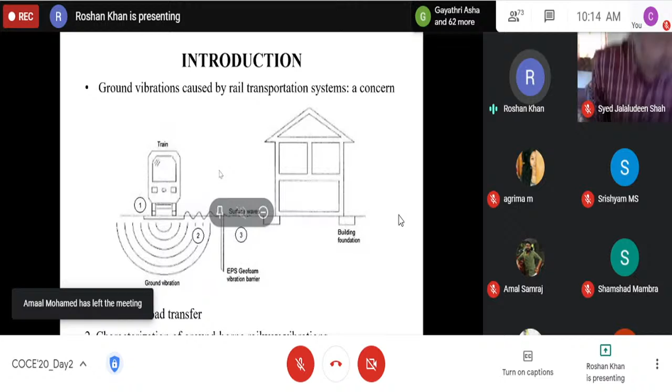And in the third phase, we can see that these vibrations are being transferred from the railway track onto a surrounding building. So we will be introducing a barrier between this so that the vibrations won't be reaching these sensitive structures close to the railway tracks.

That is our aim. So throughout this lecture, I'll be mentioning all these three parts. The first part is transfer of the load from the train. Second part is the generation of the vibrations. And the third part is how to stop these vibrations from reaching a sensitive structure.

It is known that the vibrations will be higher when the train is transferring more load onto the ground. And also when the trains are longer, the period of travel will be higher on the track, and then again the vibration generated will be higher.

So in this study, what we are trying to find out is what will be the difference, or what would be the impact, when the speed of a train changes. So that's what we are studying.

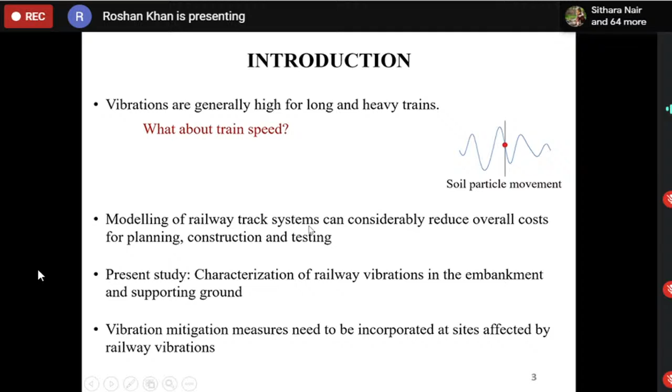And as you know, the modeling of railway track systems can considerably reduce the costs as well. So if you're considering a test in the field, it will take a lot of money and a lot of time. So instead, if you want to model n number of tests, n number of railway passages, you can do that in a software easily.

But you need to validate the software first. So whenever you're doing a numerical modeling test, or whenever you're trying to model something in the computer, first you have to validate whether your model is working properly. So that is the first challenge when you're doing this.

So once we are finding out the vibration levels, after that we are trying to find out how we can reduce these vibrations. That will be the final part of the study.

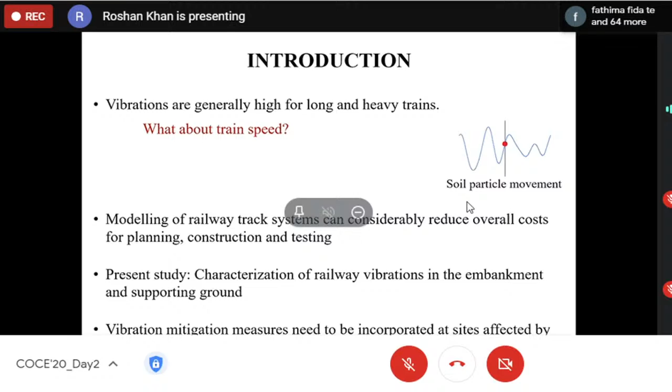So if you would go through the recent literature, what you can see is that there are two basic drawbacks in the studies currently being conducted on high-speed railway studies.

First of all, whenever we are modeling railway operations, the first thing is that we assume a load from the wheels. So you can see that there are two rails, and the wheels are rotating over the rails. And when these wheels are rotating, there is a vertical component in the downward direction and there is a frictional component in the horizontal direction.

Whenever studies are being conducted, it is generally assumed that this vertical load is dominant and usually the frictional component is neglected. But from this study, what we found out is that even this friction plays a major role in the vibrations being generated. So the first assumption general studies make is that they assume the train loads to be vertical point loads and then assign a time history. But this is wrong. In spite of having the vertical load, we should also consider the horizontal traction stresses.

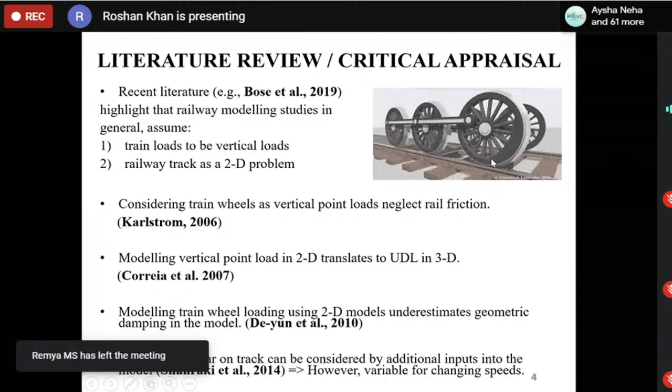And the second assumption what generally people do is they consider the railway track as a 2D problem. So the railway track basically consists of the rails, and these rails are supported on sleepers, and these sleepers are supported on the railway embankment. And this railway embankment can be above the ground surface level or it can be at the ground surface level also.

So after these rails, we have sleepers. Sleepers are supported on railway embankments, and this railway embankment is supported on the natural ground. So in this study, we will be finding out what are the ground vibrations in all these different layers.

Whenever we are considering the railway track as a 2D problem, the issue is that for a railway track stretching over kilometers, the track section will not be constant. For example, the natural ground might be filled with sand at one place, and around 500 meters away it may still have sand and silt, while the next place might have a layer of laterite. So at the site, you cannot simply assume the railway track is a 2D problem. Whenever we are modeling, we have to consider the railway track as a 3D problem.

These problems were actually discussed by different researchers over time. In 2006, Karlstrom mentioned that whenever we consider train wheels as vertical point loads, this basically neglects the rail friction. That is the reason why we need to use 3D models, so that we can consider both vertical loads as well as input the frictional stresses on the rails.

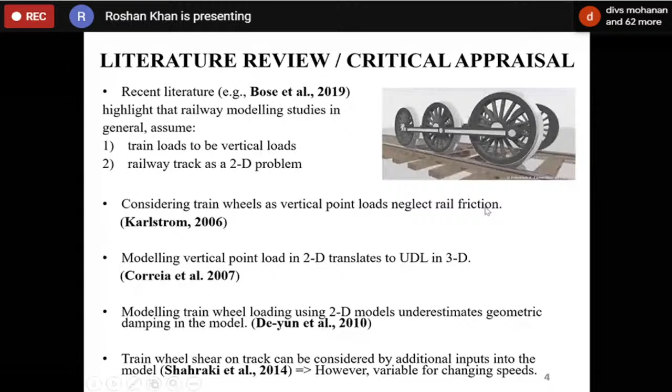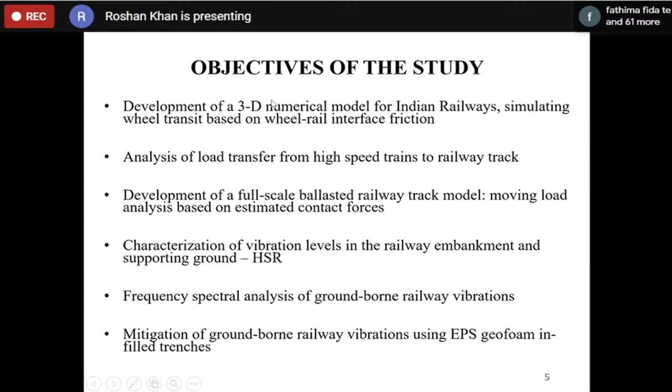As I mentioned, I'll briefly summarize this. The first part of the study will be to find out the load transfer from the wheel onto the rail. In the second phase, we will find out the vibrations caused by these forces. And in the third phase, once we know the vibration levels, we look at how we can mitigate these vibration levels.

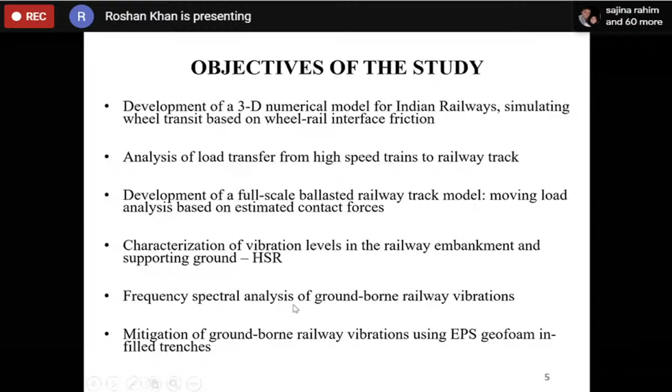One important factor to consider is that, in addition to finding the peak particle velocities of the vibrations, it is also important to mention at what frequency these vibrations are occurring. For that, we are also considering the frequency spectral analysis of the ground vibrations. I'll mention this in the later slides.

In the previous slide, I mentioned that in addition to the vertical load, we need to consider the friction in this contact patch. So what will happen if you don't consider these frictional stresses? Imagine we have a vertical point load, and when considering the passage of the wheel on the rails, the wheels will simply slide on top of it if there is no friction.

In this study, we estimate both the normal contact pressure, which is the vertical pressure acting in the vertical direction, as well as the traction stresses, which are the friction stresses acting in the horizontal direction. If the wheel is traveling in the forward direction, the friction stresses act in the backward direction, so friction will be equal and opposite on the rails.

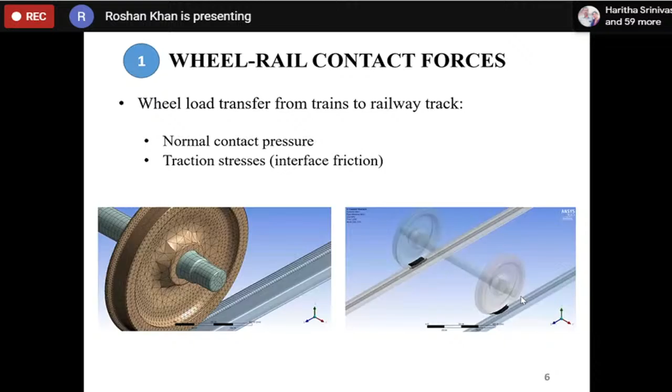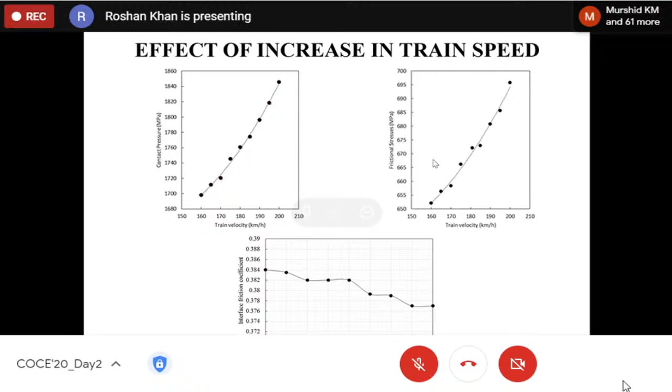So we're considering an increase in train speed by 25%, and we're considering how the contact forces act when there's an increase in train speed from 160 to 200 kilometers per hour. In both these top graphs, you can see that both the contact pressure as well as the frictional stresses increase with respect to the train speed.

This is a quadratic increase, as you can see, but the two are not similar. The vertical contact pressure is increasing more steeply, while the frictional stress increase is slightly less steep. So the contact pressure increase is higher than the frictional stress increase, and this is represented by the third graph, which shows the wheel-rail interface friction.

There is friction occurring between the wheel and the rail, and normally for steel interfaces, the interface friction coefficient value is 0.4. But in our study, we found that the value doesn't stay at 0.4. With the increase in train speed, the interface friction value starts reducing.

Just imagine that in this case, the train speed will be higher. What happens is we will again have a drop in the interface frictional coefficient value, so this will start dropping. At one point, we may be losing traction, so that the wheel won't be able to spin properly on the rails. So we should always maintain this value at an optimum value of around 0.35, so that the train doesn't slip on the rails. That is considered the optimum value internationally.

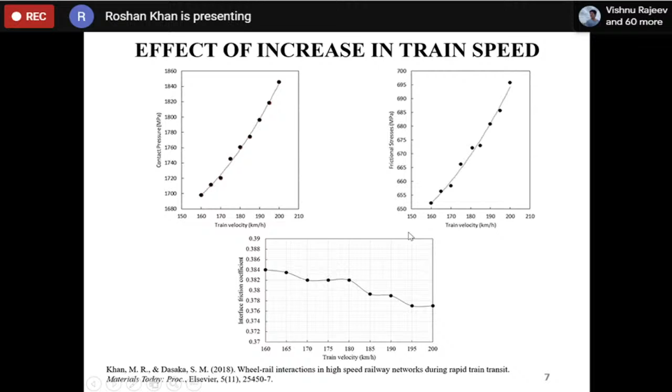From these three graphs, we are able to understand what load is being transferred from the train onto the track. These vertical, contact pressure, and friction values become the input for the second phase of the study. In this second study, we try to model a 150-meter track length of the railway, and then simulate the train traveling from one edge of the model to the other, at different train speeds.

From the previous study, we know what different train loads act for different train speeds. So whenever we want to simulate a train traveling at different speeds in this model, we can simply assign the load value on top of the rails. We don't have to model a wheel again and run that simulation separately. We can directly input the value of load as well as the friction occurring, so that we'll be able to find out the ground vibrations.

The figure on top is the railway embankment section specified by the Ministry of Railways in India. This embankment section is designed for carriage of axle loads up to 32.5 tons, which is the maximum axle load currently permitted for operation on the Indian Railways. These are the different strata in the railway embankment: on top we have the rails.

Rails are supported on sleepers, and these sleepers are supported on the ballast. When we are traveling by train, whenever we look out of the train, we see the ballast, we see the sleeper, and then we see the rails.

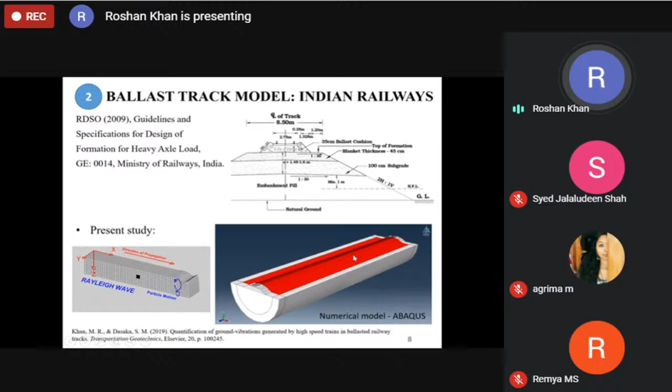Since we are considering a maximum axle load of 32.5 tons, we have considered this exact same section, and this railway embankment section is what you can see in the right portion. We have extruded this section to a length of 150 meters, so that we are able to simulate the moving load traveling on top of the rails. The objective of developing this numerical model is to find out the vibrations which are generated during the passage of the train.

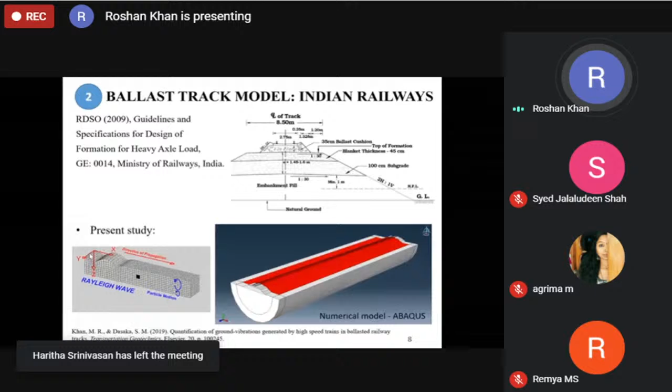In the left side figure, the origin is considered as the point where there is an axle load passing. From this point, there will be vibrations passing on top of the ground, as well as vibrations passing beneath the ground surface level. On the surface level, the vibrations will be maximum, and then there will be body waves passing through the ground as well. So we have to quantify both of these.

So we are quantifying data in this analysis domain, and this white colored outer portion is the infinite element domain. I will speak more about infinite elements in the later slides.

We have also considered different densities, so for different relative densities, all these properties will change. We are only considering sand here, but sand at different gradations and different densities. So here we are considering dense sand and medium dense sand, and for the corresponding values for the Young's modulus, the Poisson's ratio, and density is considered, and we are also considering the friction angle value as well as the dilation.

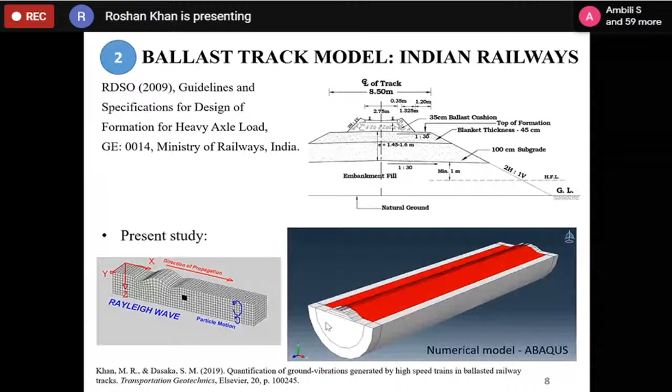So basically the first boundary condition is that there is a symmetry at the center, so there is half section of the track, and this symmetric section assumes there is another half in this direction as well. In the second figure, you can see that the longitudinal boundaries of the model are restricted as well, so the soil cannot move in the longitudinal direction. The soil can deform in the vertical direction, and the soil can deform in the outward direction from the railway track, but not in the direction of train transit. That is the second model boundary condition.

Then the third thing is that I spoke about infinite elements. This circular portion represents the infinite elements, and this is basically assigned in dynamic simulations when we are trying to simulate vibrations.

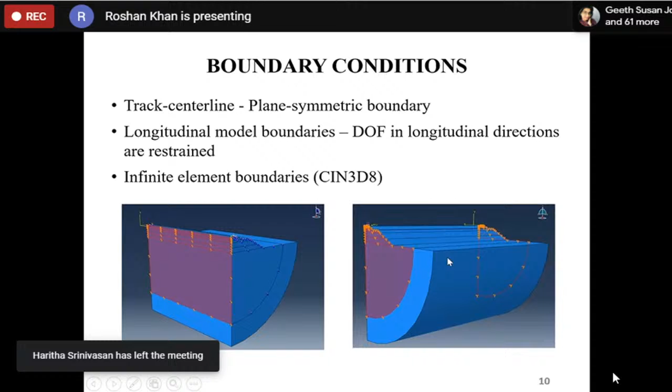So the purpose of an infinite element is to absorb the vibrations without reflection. I'll give an analogy for this. Just imagine you're having a rubber ball in your hand, and if you throw it against a hard wall, the ball will bounce back, right? But if you're throwing it to a soft wall, the ball won't come back. It will hit the wall, and it will just fall down.

So whenever we are having a stiff wall, if you throw something at it, it will come back with a higher speed. When it is soft, it won't come back. So these boundaries actually act as absorbing boundaries. Whenever a vibration is coming to this boundary, it doesn't go back, it doesn't reflect back, because in the field there is no boundary. In the field, this soil will be stretching too long. In the software Abaqus, we have made use of element code CIN3D8. These are basically 3D infinite elements.

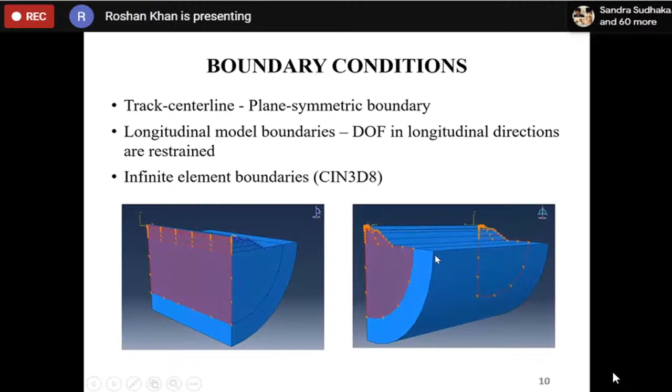Whenever we are doing numerical simulations, we have to consider the damping of vibrations. The damping of vibrations basically has two aspects: the first is geometric damping, and the second is material damping. Since we are considering a 3D model, it will automatically consider the geometric damping, because whenever there is a vibration and it is traveling to a farther place, the vibration wave actually expands. So whenever there's an expansion of the wavefront, there is damping. When we consider a 3D model, we're already considering geometric damping, but we have to additionally input the material damping for different layers.

For this, if you refer the textbook of Chopra, there is an equation for the C value. This C basically comes from the equation of motion: mx double dot plus cx dot plus kx is equal to 0. That cx dot, that C, is represented by this damping term. This damping is actually having two components: the first is mass-weighted damping, which is alpha, and the second is stiffness-weighted damping, which is beta.

If you refer to the literature, these values are taken from different sources. I just summarize so that if someone wants to apply this, they can directly substitute the equations. The alpha is calculated from this equation and beta is calculated from this equation. The omega is the angular frequency, and zeta is the damping ratio. We have equations for estimation of these as well - omega is the angular frequency, the mode of natural frequency, and from this we compute the value of omega 1 and omega 2.

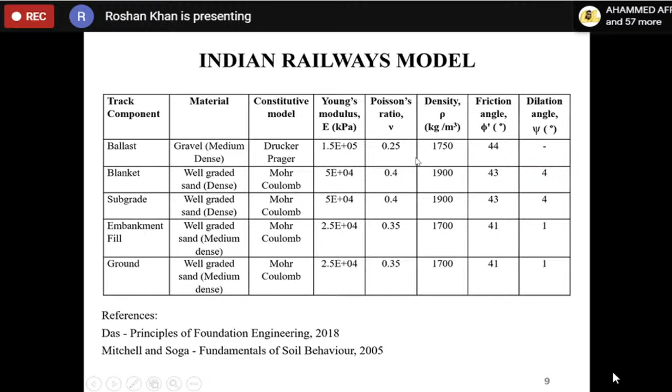In order to find out the natural frequency F1 and F2, these are rough empirical equations. From these, Vs is the shear wave velocity, H is the thickness of the layer. In order to estimate the shear wave velocity, we also have an equation. In this table, we have the E value, the elastic modulus, Poisson's ratio, and density. Using these three, we can estimate the shear wave velocity, and this can be substituted into the equation of natural frequency. The Vs is substituted, H is the thickness, and omega is the natural frequency.

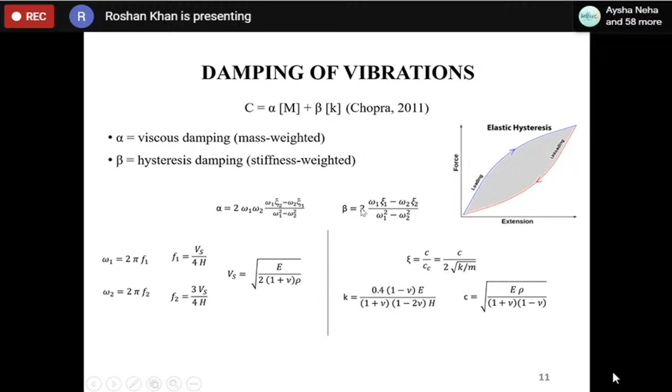Similarly, there are equations for the damping ratio as well, again based on the same E, nu, and H values. Once you know this, you'll be able to find out the stiffness, and then substitute all this into the equation to find out the value of damping.

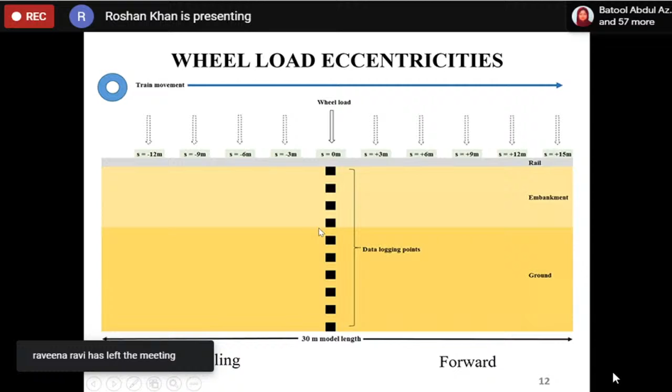So this is the actual simulation which we are considering. Just imagine that this is the railway track of 30 meters length from left to right, and we are taking the data at the central data measurement location. Out of this 30-meter track length, we are considering a vertical section where the vibration data is quantified and recorded at different depths. The top shows the railway embankment with different strata, and the bottom shows the natural ground supporting this embankment.

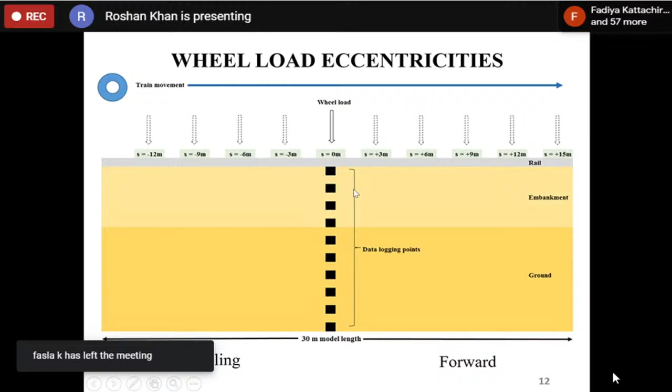Whenever a train wheel passes from the left side to the right, we continuously take readings. This S value represents the eccentricity of the wheel load from the data measurement section. When the passing wheel is exactly on top of the data measurement section, the eccentricity value is 0.

If the train wheel is at a location of -3 meters before reaching the section, it is considered a trailing eccentricity. Once the wheel load passes the data measurement section, it is considered a forward eccentricity. So when the train wheel is at trailing eccentricity, it is approaching the data measurement section, reaches S equals 0, and then passes to the forward eccentricities.

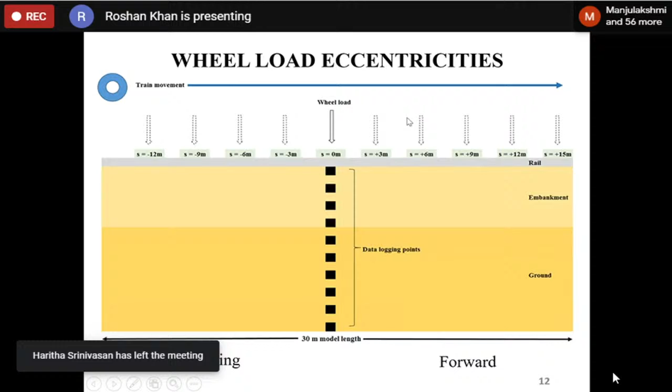We are continuously taking readings of vibration when a train wheel is approaching, when it is vertically on top, and when it is passing away from the data measurement section. This measurement is considered at different depths in the ground and also at different distances on the surface level of the ground. These results will be explained in the future slides.

In the vertical direction, at every layer in the embankment, we are quantifying the vibration levels. We are also quantifying vibrations in the ground at different depths and at different distances on the surface level of the ground. Because if a structure is standing, say, at a distance of 10 meters from the track, we should be able to find out what vibration is reaching the foundation level of the structure. For that, we are also considering the horizontal data measurement points.

What we observed is that when the passing wheel load is vertically on top of the data measurement section, at S equals 0 meters, the vibration levels are maximum at different points. The vibrations are second highest after the passage of the wheel load to the forward position, and the vibrations are least before the wheel reaches the data measurement section. So vibration is maximum for S equals 0, then higher for forward eccentricities, then lower for trailing eccentricities.

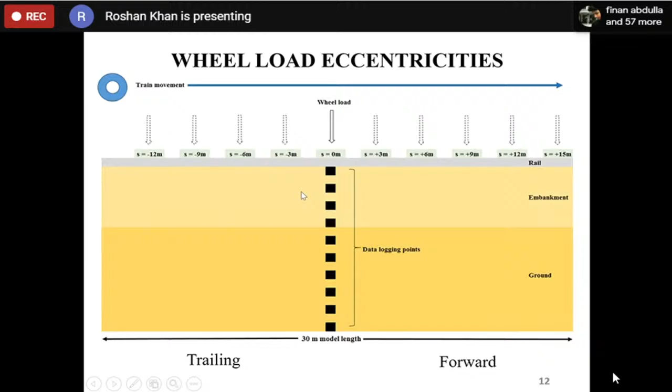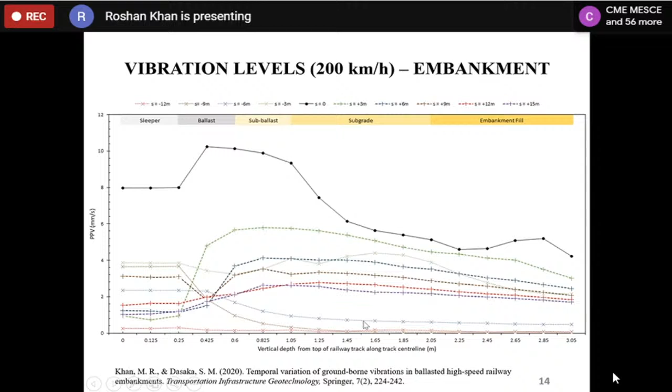This graph is shown here. With increase in depth, there is a reduction in the vibration. This basically means the vibration is maximum at the ground surface level, and when you go to higher depths in the ground, the vibration actually reduces.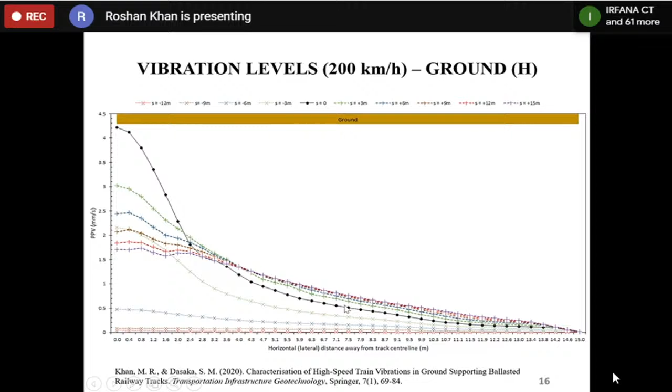In general, the BD30 is a train running in Norway. So we have taken their bogie specifications because this train is designed to run with axle loads up to 30 tons. This suits our design analysis, so we have taken specifications from them, and these are the different values.

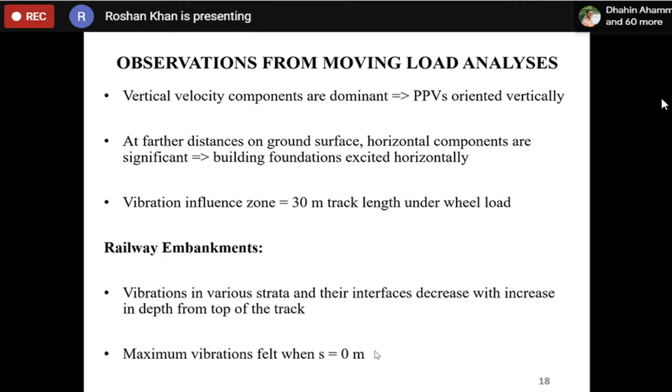It was observed that the vibrations in the railway embankment and the ground decrease with increase in depth. So the maximum vibration is at the top level, and when going deeper in the ground, the vibration levels start reducing. Also, the maximum vibrations are felt when the wheel load is located exactly on top of the location of interest. For example, if you're considering a point on the site, when the passing wheel load is located vertically on top, at that point the vibrations will be maximum.

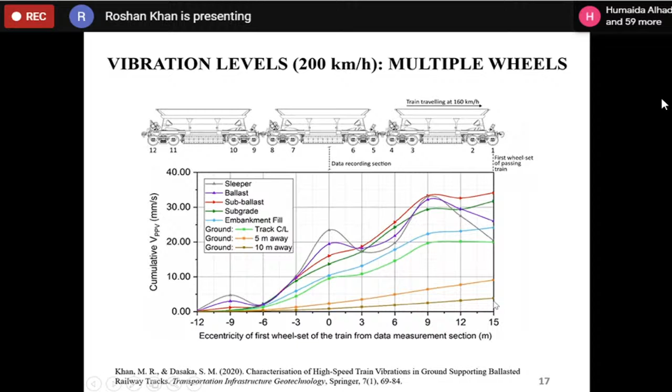So even after the passage of a train, we will still be able to experience vibrations - that is the reason why. This vibration has a value of 2 mm per second. We also observed that at the ground surface level, the attenuation of vibrations will be lesser compared to the depth. So with respect to the depth, the reduction in vibrations is higher, while with respect to the horizontal surface level, the vibrations will gradually decline.

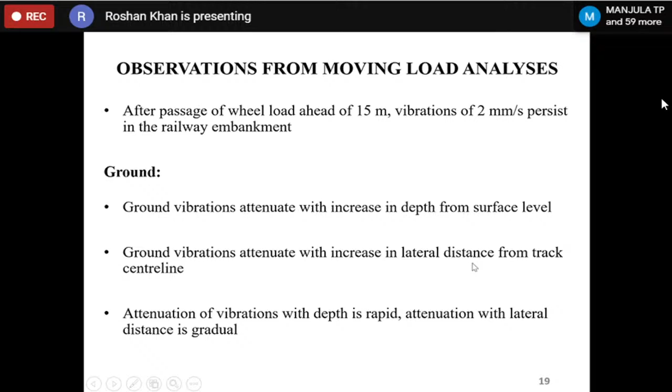As I mentioned, when quantifying the ground vibration levels, we also need to find out the frequency with which this vibration is occurring. Whenever we have to mention this to an expert, we have to say that the ground is vibrating at this much velocity at this much frequency. So in order to find out the frequency, we take the time history of vibrations and convert this using FFT, that is fast Fourier transform, converting the time signal to a frequency spectrum signal.

So for this, since we are considering time scales less than 1 second, we are doing zero padding as well as Hann windowing. More details about this are presented in the paper. I'll share the details. So we are doing signal conditioning using Hann window.

Hann window is considered because the signal starts from 0, increases, and when it comes down, it doesn't actually touch 0 again - it's having some residue. So what we do with Hann window is force this signal slightly to 0, so that whenever we do FFT, we need to repeat this same time signal n number of times, and each repeated time signal will be continuous - it will increase, it will decrease, then the next signal will increase and decrease. So to make a continuous profile, we make use of Hann window.

And then when we do an FFT, this is the frequency scale. So this scale is for time versus peak particle velocity, and this one is for frequency versus peak particle velocity. So the time signal is converted to the frequency signal.

What we observe is that the peak frequencies are mostly in the range of 90 hertz, and then there are subdominant frequencies. You can see there is a peak - this peak is the dominant frequency. And then there are other small peaks, which are the subdominant frequencies.

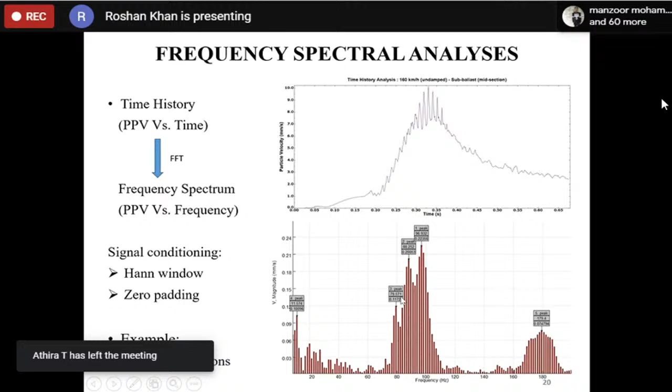So we're considering the top 5 dominant frequencies here, and we can see the one which is highest. This mentions that 96.93 is the dominant frequency, and then there are subdominant frequencies - this is the second one, third, fourth, and fifth.

So I'll just summarize this in a table here. The FFT was done using the software SIGView, a signal spectrum analysis software. And these are the different dominant frequencies of vibration we observed in different railway embankment strata.

So F1 is the dominant frequency, and these are the subdominant frequencies. One thing you can observe is that the dominant frequencies of vibration are mostly in the range of 85 to 95 hertz - you can see values from 85 up to almost 95, 97 hertz. And the subdominant frequencies can go up to frequencies like 200 plus hertz, on the scale of hertz.

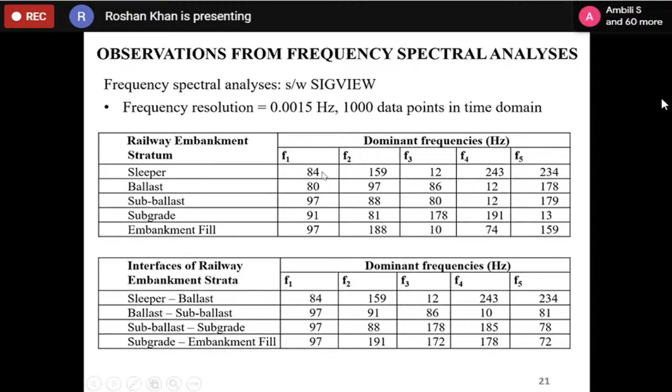So hertz means, for example, 84 hertz means the ground will vibrate 84 times a second, for different lateral distances from the ground surface level. So we can see that most vibrations have a dominant frequency in the range of 90 hertz. For Indian railway track conditions, if a train is passing at very high speeds, dominant frequencies of vibration will be around 85 to 95 hertz, limited to 100 hertz. But you can see there is a drop in frequency to below 10 hertz - at a lateral distance of 10 meters, the frequency drops to 9 hertz, then 6 hertz.

So you might think higher frequencies of vibration are more serious, but it's not like that. Even lower frequencies of vibration have their own demerits, because earthquakes actually have vibrations of say 1 to 4 hertz, but they cause a lot of destruction, right?

So whenever we have low frequencies of vibration, and the fundamental frequencies of vibration of buildings are in the same range, it will cause resonance. What is resonance? When the natural frequency of a building and the incident vibration are both in the same frequency range, there is movement occurring in the building - severe shaking, which causes distress to the residents staying inside. This is why we try to stop vibrations from reaching a building, so the building doesn't undergo any vibrations.

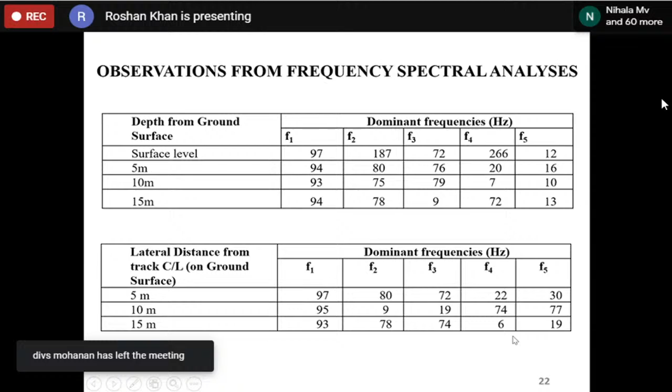So we can see from this table that the vibrations are going below 10 hertz - we have values of 9 hertz and 6 hertz. In most high-rise buildings, fundamental frequencies usually fall in the range of 1 to 5 hertz.

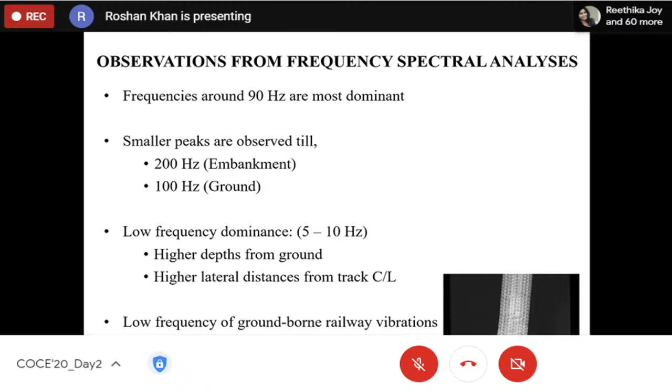So in our case, when we are having such vibrations reaching the foundation of a building like this, the incident vibration and the natural frequency of the building both will be the same, and this will cause resonance in the building, causing severe sways. So we need to stop this.

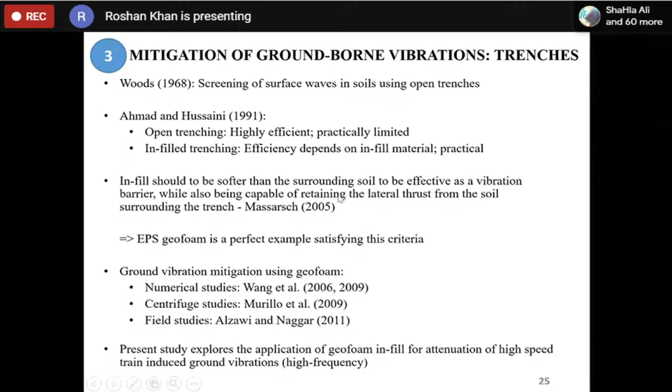And a study which we have conducted to find out how we can reduce these vibrations. So this is the same railway track model we have used for finding out the ground vibrations, and in addition, we are modeling a trench. This trench is infilled using EPS geofoam.

For our purpose, we are using EPS geofoam, and we are trying to find out how we can reduce the vibrations passing from the track onto the structure standing away from the railway track. Vibrations are created in the railway track, pass through the ground, and before reaching a structure standing away from the track, we are trying to reduce these vibrations. That's why we are putting a trench in between.

So in addition to the previous analysis, after putting a vibration barrier, we are trying to find out the reduced values of vibrations observed here. In the first study, we know what vibrations pass. In the second phase, we are putting a barrier, and then trying to find out the reduction in vibrations at surface level.

As part of the study, we are trying to find out how the properties of this trench itself will be reducing the vibration levels. The four different parameters we are considering are: first, density of the geofoam, which is a material with very low density. We are analyzing densities from 15 to 25 kilogram per meter cube, which is much lesser than the soil. So the density of the geofoam is one factor.

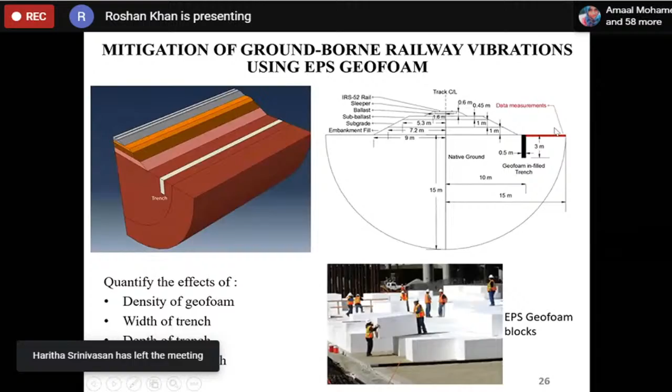Second is the location of the trench. This trench can be near to the railway track, and the trench can be away from the track as well, near the structure. So how the position of the trench affects the vibration is also studied. And I have taken this from his work.

These are the different grades of geofoam we are considering. EPS 15 means the density of geofoam is 15 kilograms per meter cube. We are also considering EPS 20 and EPS 25. From these three, we are trying to find out the impact of geofoam density on the reduction of vibrations.

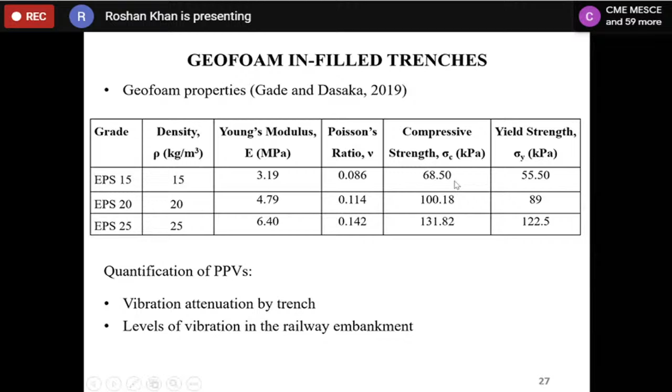These values are estimated from the empirical equations provided by Gade and Dasaka. Here, what we have observed is these are the four graphs showing the impact of density, impact of distance, impact of depth, and impact of width. I will explain all four graphs.

The first graph shows the reduction in vibration with lateral distance away from the track center line, plotted as peak particle velocity. You can see that when there is no vibration isolation trench, the vibration is maximum. When using geofoam with higher densities, the vibration is still higher, but when using geofoam with lower densities, we are able to reduce the vibrations much more efficiently. So from this, we understand that in order to reduce the vibrations, the density should be low.

Then this is the graph for depth. When there is no trench, these are the vibration levels, and these are the vibration levels for different depths. It's not changing much, but we can see that when the depth is lesser, the vibration levels are high, and with an increase in the depth of the trench, we are able to more efficiently mitigate the vibration levels. So from this, we understand that the depth of the trench should be high.

The third factor is the distance of the trench from the track center line. Imagine the trench is located close to the railway track - in that case, the overall reduction in vibration is higher. And from this graph, what we observe is that the width of the trench should be higher.

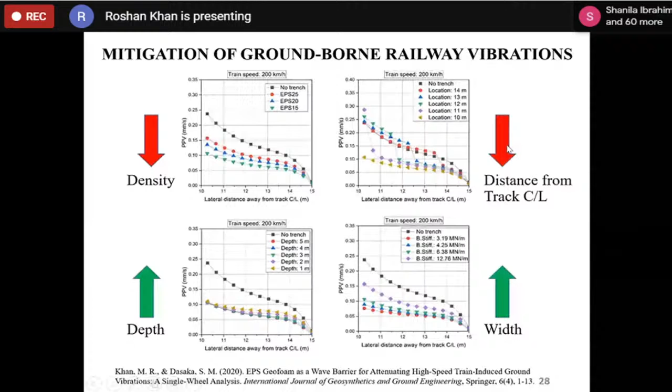From this graph, we understand that we have to provide geofoam infilled trenches with higher width. The density of geofoam should be less, the depth of the trench should be high, the width of the trench should be high, and the distance of the trench from the railway track should be lesser if we want to reduce the vibrations. That was for a single wheel analysis, and these are the different graphs for multiple wheel analysis.

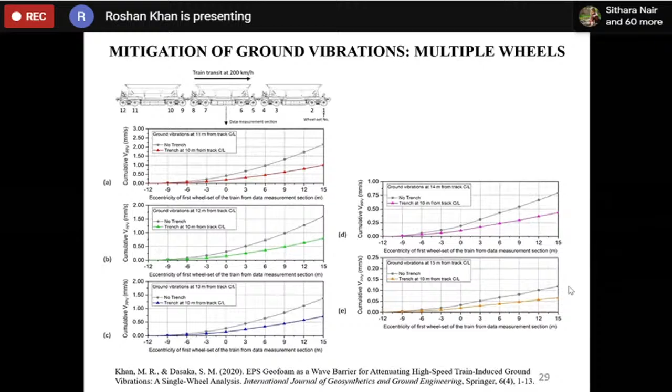This is just a summary of the previous graphs. We can see that the trench depth should be high, the trench width should be high, the density should be low, and the distance of the trench from the track should be low.

What we observed is that when we are using EPS 15 geofoam with a trench depth of 3 meters and a trench width of 0.5 meters, we are able to attenuate the vibrations by almost 53%. So imagine if you're having a PPV of 10 mm per second, you are able to reduce it to 5 mm per second. It's almost half the vibrations.

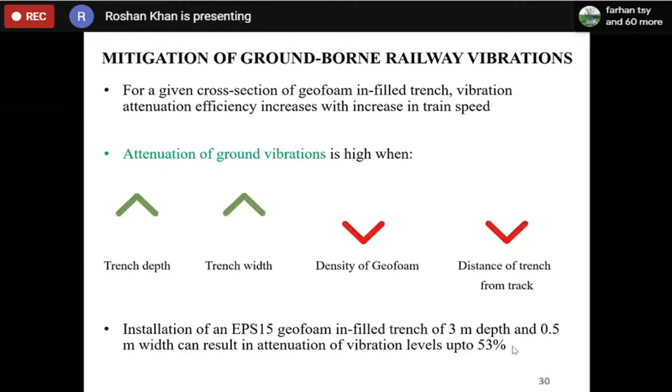This is regarding the reduction of vibrations. But another aspect we have to consider is that whenever we are putting a vibration isolation trench, there is a reflection of vibrations. How does this vibration get reduced? Whenever the vibration is passing, when you're putting a barrier in between, this barrier will reduce it. But how does it reduce? It will actually absorb some vibration, and it will also reflect some vibration back.

What the trench does is reduce and transmit the wave, but how it reduces is that it will absorb some, and it will also reflect some vibrations back. So when this trench is located close to the railway track, these vibrations go back to the embankment, and the structures standing close to the railway track will be saved. But the railway track itself will experience higher levels of vibration.

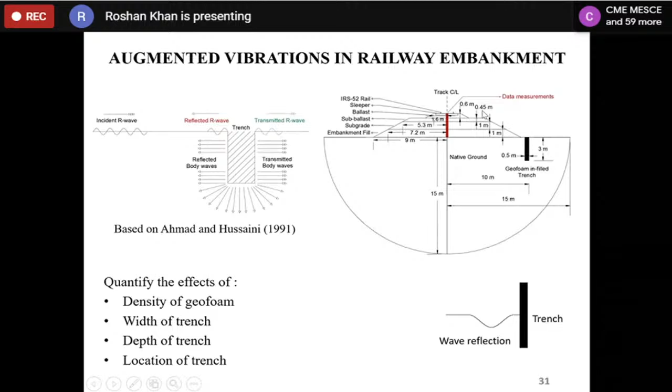In this study, we are trying to find out the impacts of all 4 properties of the trench, and how this will affect the reflection of the vibrations. This figure shows the reflection of the vibrations. You can see that an incident vibration hits the trench, and this vibration is reflected back into the railway embankment. So putting a vibration barrier is good for the structure standing outward, but it is also detrimental to the railway embankment structure. We are trying to find out how much deterioration is caused, and these are the different results we have obtained from the analysis.

First, what we observe is that when the density of the infilled geofoam is high, such as when we are using EPS 25 geofoam, the reflection of the vibrations is high. This black colored graph shows the vibration level when there was no trench. This is the vertical depth in the rail base. We have an embankment depth of 3 meters, and these are the different values for the sleeper, ballast, sub-ballast, and the different layers. You can see that when we are putting a trench, there is an increase at the sleeper level.

Whenever we are using geofoam with higher densities, the reflection of vibrations is more, meaning it is more problematic. When the depth of the trench is higher, again the reflection is higher. The third factor is the distance from the track center line. What we observe is that when the trench is located close to the railway track, the reflection of vibrations is higher. So the distance from the track center line should not be too less, otherwise the reflection of vibrations will be high. It should be such that the vibration levels should not be much; if you see, the impact is lesser.

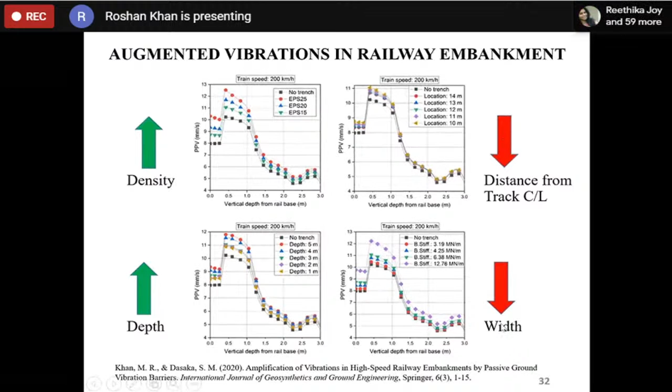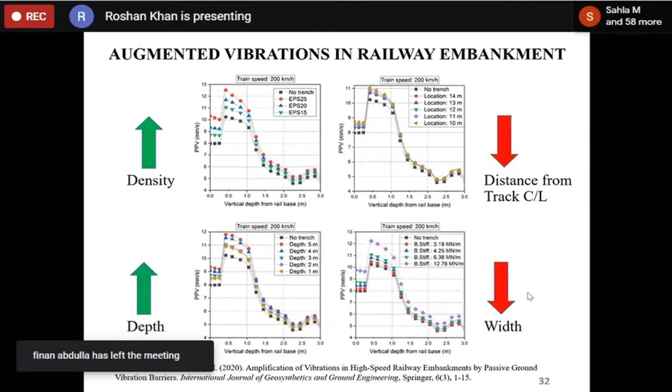But again, what we see is that when the trench is located close to the railway track, the vibrations will be higher. Regarding the width of the trench, what we observe is that when the width of the trench is lesser, again the vibration reflection is higher. So if you're installing trenches with higher width, then the reflection will be lesser. That should be our preference.

And again, these are for multiple passing wheels of a train. These are the vibrations recorded in the different layers of the embankment. The first one is for the sleeper vibrations, and the second one shows the ballast vibrations.

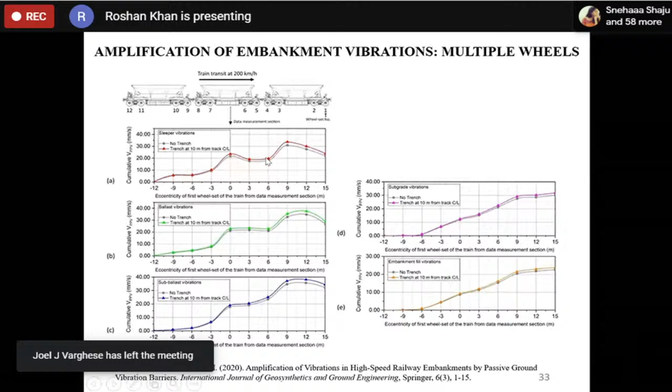This is the sub-ballast, subgrade, and the embankment fill. Two graphs are represented. The bottom one shows when there is no trench, and the red one shows when we are putting a trench at a distance of 10 meters from the track. We can see there's a slight amplification of the vibration levels in the railway embankment.

This is a summary of the previous graphs we discussed. Amplification of the embankment vibrations is something we don't really want. This is also higher when the trench width is smaller, as well as when the distance of the trench from the railway track is less.

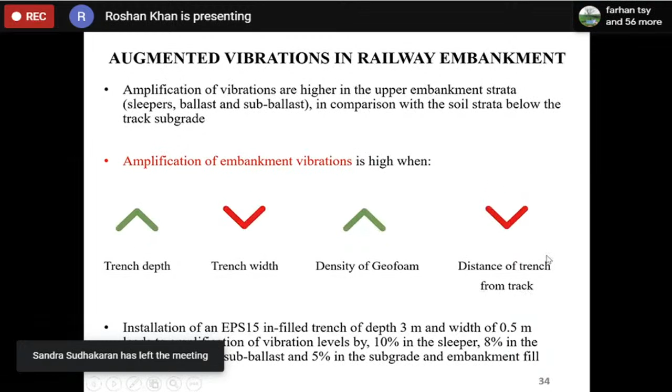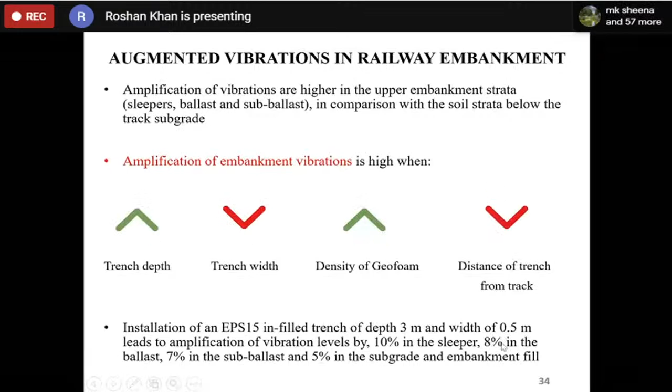What we observe is that if we consider the installation of an EPS 15 infilled geofoam trench with a dimension of 3 meters depth and width of 0.5 meters, there is an amplification of vibration in the sleepers by 10%. There's an amplification of 8% in the ballast, 7% in the sub-ballast, and in the layers below the sub-ballast layer, the subgrade and embankment fill, the amplification is almost 5%. To summarize, I won't be discussing more on the results.

In our study, first we tried to find out the wheel load which is being transferred from the train onto the track, and we made use of the software ANSYS to do this. We had quantified the vertical contact pressure as well as the traction stresses.

In the second phase, we tried to quantify the vibrations generated due to these loads. These vibrations were quantified in all three directions, the horizontal directions as well as the vertical direction, and from that we computed the peak particle velocities of vibration. Then, once we have the peak particle velocities, we convert the time signal to the frequency signal to find out the frequencies of vibrations. This is done using FFT.

Once we know the vibration levels, we made use of EPS geofoam as a trench infill material so that we are able to reduce the vibrations traveling from the ground onto the structure. These trenches are installed between the railway track and the sensitive structure so that the vibrations propagating to the sensitive structures are reduced.

In our study, we tried to find out the efficiency of EPS geofoam. There have been previous studies using different materials like rubber tire mixtures and open trenches. What we have seen is that open trenching is the most efficient method, but open trenching is not always possible in the field, right?

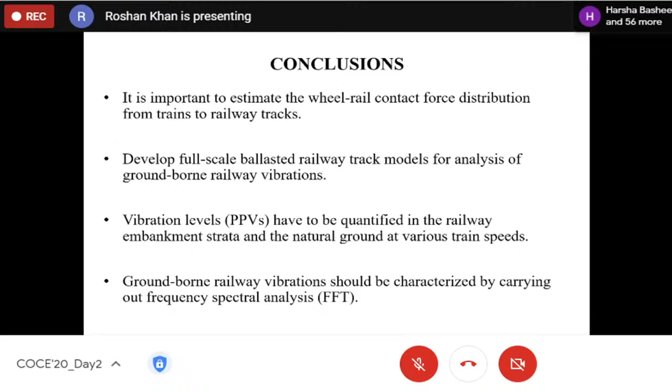Because if you're having a trench of 3 meters depth, we cannot simply keep it open, because someone will fall into it. Also, the trench might collapse because the walls of the trench might not stand. In case of cohesionless soils, the trench will collapse. So we have to infill the trench with a suitable material which is able to absorb these vibrations. In our case, we made use of EPS geofoam for this.

So this is the summary of my keynote lecture. I would like to thank everyone for their valuable time.

Now people will appreciate the amount of work which goes into making big infrastructure projects possible. Yes sir, a lot of research is required, a lot of analysis is required, and it is not a simple thing. We all want high-speed railways and all good facilities, but now definitely the civil engineers who make all these facilities, at least now we have many people who can appreciate this. You have really impressed upon the people the kind of work, the hard work which goes into this. I'm sure the people will have many things to ask you. Thank you, sir. Thank you, Dr. M. Roshan Khan.